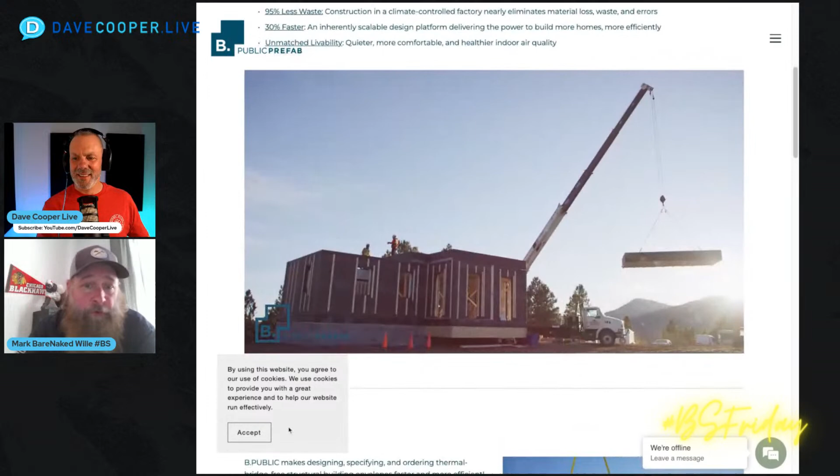And then most recently, when they were back on, yes, my voice was gone again. For folks that don't know, I'm allergic to dust, so wood dust, which is great that I'm a carpenter. Cellulose is horrible for me. So Dave is sitting there, my mouth is moving and you can't hear me.

So this is great. Good friends of all of ours. We all spent time together at IBS. Dave and I built their booth for the high performance thing. And Jonah and Edie, really special people, in Las Vegas, New Mexico. So if you don't know them, you should check them out. Their website is on there and you can see what they have going on.

All right, Mark. So we have some more. We're going to pick up the pace here. Holzraum System. You remember Holzraum System? Am I saying it right? Yes. They're based out of Philly.

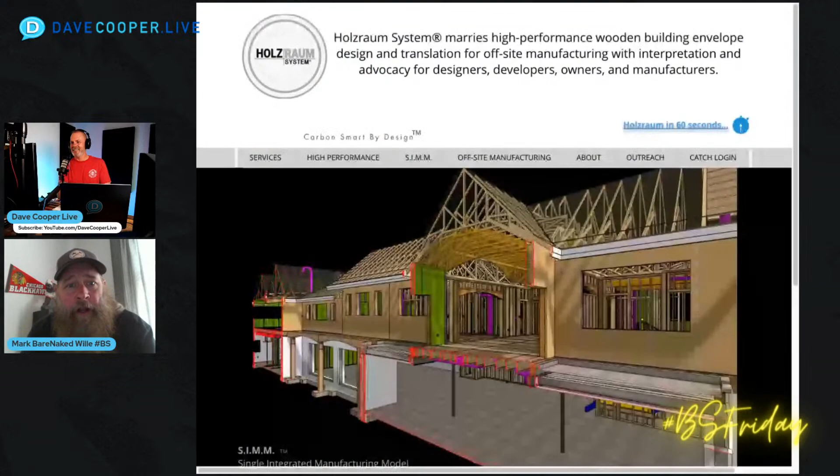It's David, and it's Ilka, and it's Steve, and they have the single integrated manufacturing model, known as SIMM. It's an acronym. And they've worked with folks like Blueprint Robotics for the house that you're seeing there.

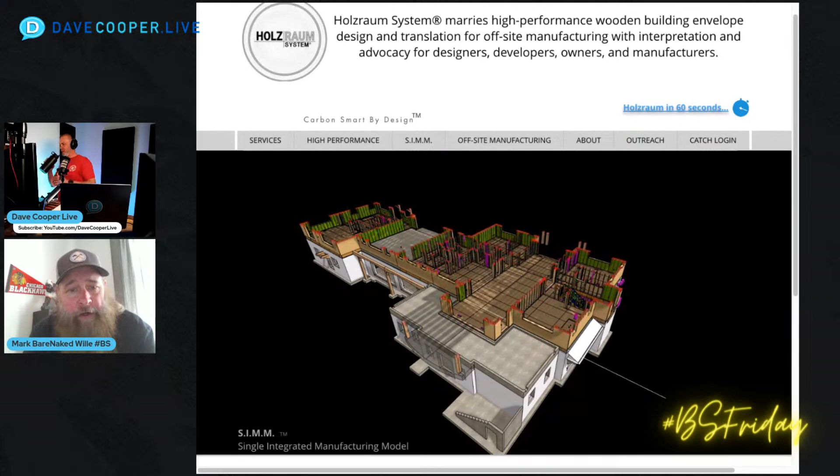It's a wonderful, robust, resilient home that is done to the Passive House standard. It's won Passive House awards. And every single component is in their catch system.

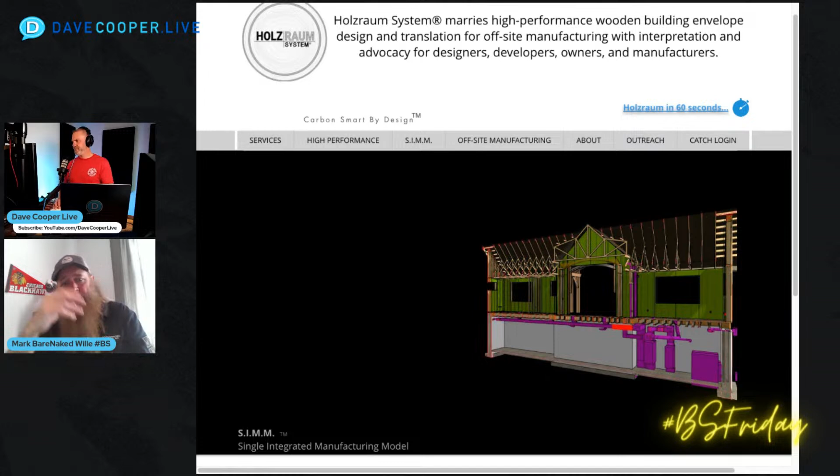And what it does is it's an integration from the parts and pieces to the different component and system companies that come together, as well as all the assembly and clash detection for your mechanical, your electrical, your ventilation, your plumbing. That's why you see all those things flickering on there.

Each one could be pulled out to make sure there's no thermal bridging, to make sure that there's air control layers, there's vapor control layers, the structural's in place. And this includes the finishes. It's all done in a factory. It's all put together on site. So it's like BIM, but it's integrating at a different level.

They've developed SIMM just for themselves, and I believe we've had them on a total of 3 times, Dave. Yeah, we have had them on, I think 3 times, and every time their system got better and better and better. So what's fun about that, if you really want to see the progression on how they get the system up and running and working, we kind of discussed it all 3 times and where they were and where they are now. It's quite impressive.

Steve's background is timber framing and different wood systems. And of course, he's also a Passive House consultant, as is Ilka, and their training, along with Steve's brother, who does all that electronic systems back end, is really fascinating. So check out Holzraum, check out SIMM.

They are the glue, the web that puts all that together. And when you're going through that, when each trade is actually going through the system, guess what, Dave? What's that? You don't need any special software. Your notes and your comments and review get plugged right in, and you don't need that special software. They integrate that so that you don't have to have that to do it.

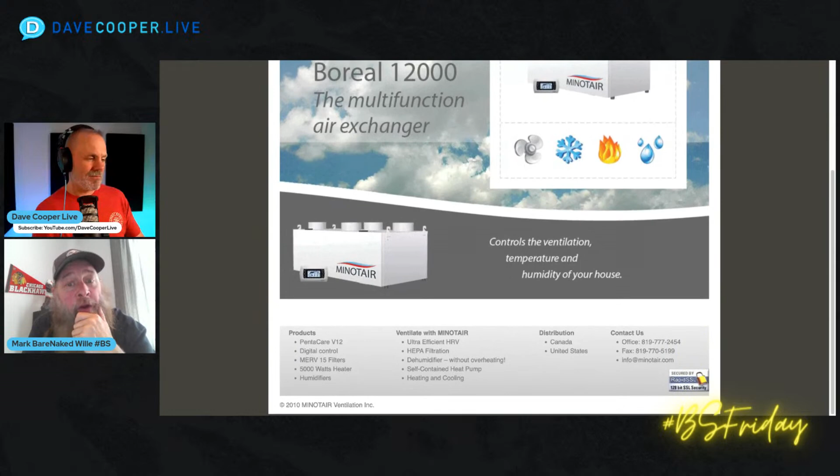There's the Minotair. Hey, guess what, Mark? Do you need an outdoor condenser with this machine? So there's not an outdoor system. However, if you have an outdoor system, let's say that's working with your water, there's a special plate you can have put in it so they talk to one another. Like Andrew of G-Pod has a combination of Minotair, Sanden, and Mitsubishi. All three of those machines work together to deliver everything based on the volume and uses of the appliances.

A nice 600 to 900 square foot space will really benefit from the attributes and system of Minotair. For sure. Simple controls, by the way. So simple, and it's ready to go. It's plug and play. Yeah, and personalized service as well.

Alexandre is one of my favorite people. Every time I see him at a trade show, or this last year at IWBCC when they were with Greenbuild, he almost tackled me. It was so much fun. Yeah, the Greenbuild got a whole slew of rebirth this year, which is great because of the combined shows. That was a big part of the success, Dave. I'm glad you highlight that.

What is it, Washington D.C. now this year? It is Washington D.C. this year. The Building Systems Council summit is in Washington D.C. this year. The Housing Innovation on the Washington Mall, everything's in Washington D.C. this year. I guess everybody wants the politicians to get their heads out of their back end and pay attention to what we're doing.